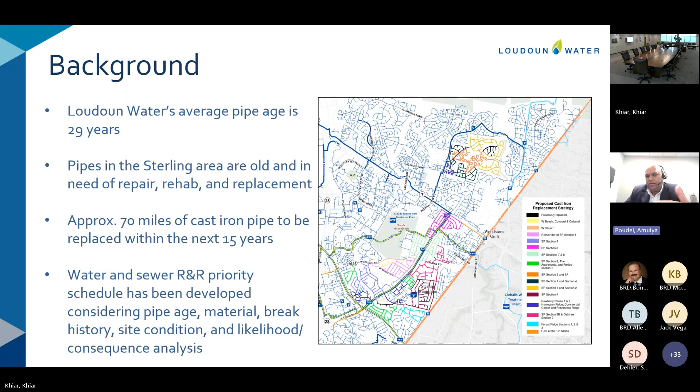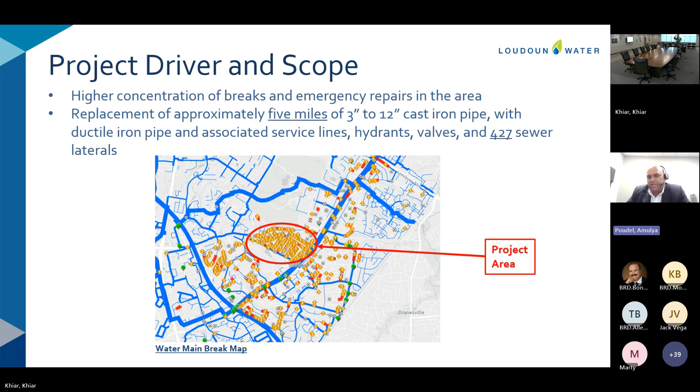Going back to the slide, the reason we do not have these 2 sections included in this project is that even within this area, these 2 streets in particular had a higher concentration of breaks. So we carved them out as a separate project. The board approved it a couple of months ago, so design is already underway, and we plan to put them into construction sometime next year. We just carved these out as a separate project earlier than this bigger package I have in front of you today.

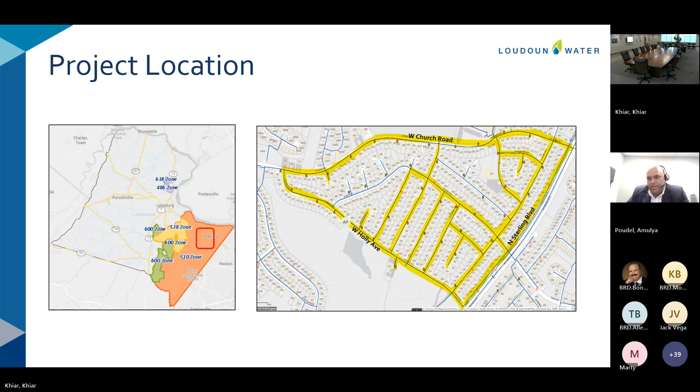I do not see any raised hands, so I'll keep going with my presentation here.

This is the typical scope of work associated with a linear project like this. The consultant will be tasked with providing project management throughout the duration of the project. Design services on this task order will include aerial survey, topographic base mapping, some geotechnical investigation, and primarily preparation of bid drawings, specifications, and cost estimating. On the permitting side, most of this water line is in VDOT right-of-way in a roadway, so there will be heavy coordination with VDOT for permitting, along with some Loudoun County permits.

We are ready to bid this project. We will need some assistance from the consultant with responding to bidders' questions, preparing addenda, and things like that, as bid phase services are also included in this task order.

I have 2 questions. Sure. I assume that the sewer laterals and the water laterals are just to the property line - is that correct? Yes, we will address only up to the property line, the meter, sorry.

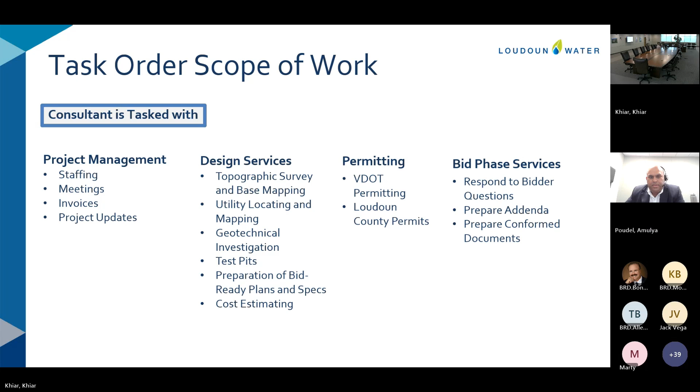So for this project, we selected J2 Engineers. J2 is one of our civil on-call consultants, and they've done several water and sewer linear projects for us just within the last couple years. They're very familiar with our engineering design manual and Loudoun County and VDOT permitting process.

For this project, what I have here is the itemized breakdown. This is a very high-level breakdown for the purpose of today's presentation, but the way we came to this is we built it from the bottom. The spreadsheet we use goes into much more granular detail, with multiple tasks, subtasks, and various labor categories. That's how we came up with this fee that was acceptable to us.

In this project's case, we had some other directly relevant projects, Broad Run Farms would be an example, about the same size, so we had data points to compare how this fee lines up with our past experience. Overall, we found the fee of $558,000 for this almost 5 miles of pipe replacement project acceptable. Most of the work will be performed by J2, but they do have ECS Mid-Atlantic doing geotechnical work, and Mid-Atlantic Utility doing the utility locating.

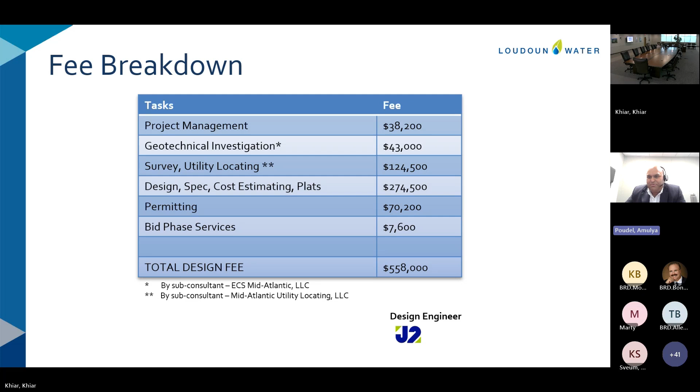Now, in terms of schedule, this is a relatively good-sized linear utility project. We anticipate about 18 months of design, followed by about 4 to 5 months of bid phase, from advertisement to CIP committee approval, board approval, and notice to proceed, followed by somewhere in the range of 20 to 24 months of construction for this project.

The next slide here, we've been tracking this in our CIP plan, the 10-year CIP plan. We've been tracking this project under Water 189.

The only thing I want to note is last year, when we were doing the CIP plan, we were tracking the sanitary lateral under a different project. But over the last year, we've talked a lot about these R&R projects, and we've come to an agreement that it makes a lot more sense to do this lateral replacement together with the waterline, since you'd already have all the maintenance of traffic in place and disturbance in the area. So this year's CIP will change this. I wanted to note that in the CIP we were tracking it under two different CIP numbers.

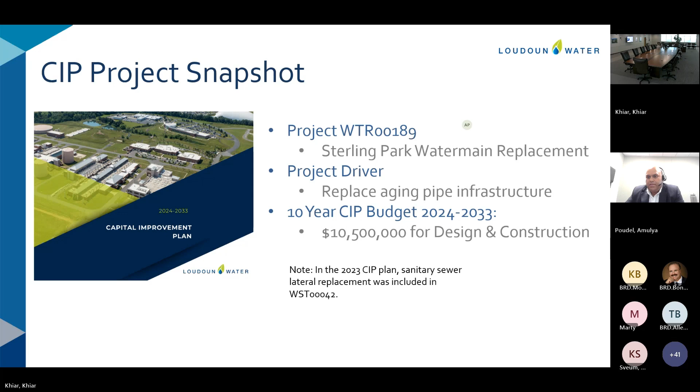And this is my last slide before the motion, so I'll pause for any questions. Do not see any questions. So with that, Mr. Chairman, I have the motion in front of you for your consideration. Are there any other questions? No, sir.

Jim, you want to read the motion? You seem to be ready. I'll be happy to.

I move the recommendation to the board to award a design task order for the Sterling Park Water Main and Sanitary Lateral Replacement Project to J2 Engineers, Inc. for $558,000, with an approximate 5% contingency to be controlled by the general manager, for a total authorized budget of $586,000. Additional costs will require board approval. I further move that this should be placed on the consent agenda.

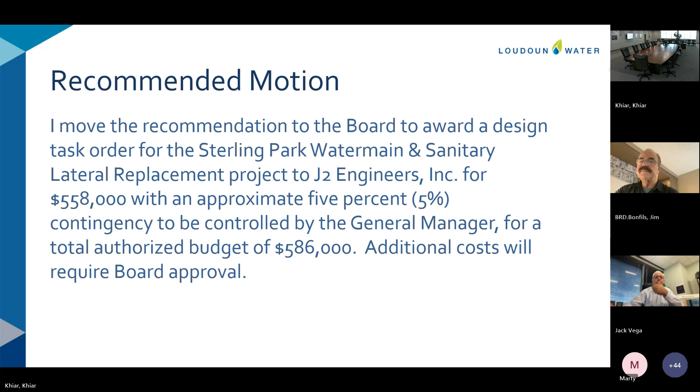Thank you, Mr. Chairman. Okay, the next item is the study task order for Belmont Ridge Road Water Transmission Main upsizing.

So, project location: this project is in the 538 pressure zone, generally located along Belmont Ridge Road between Route 7 and Trap Rock Water Treatment Facility.

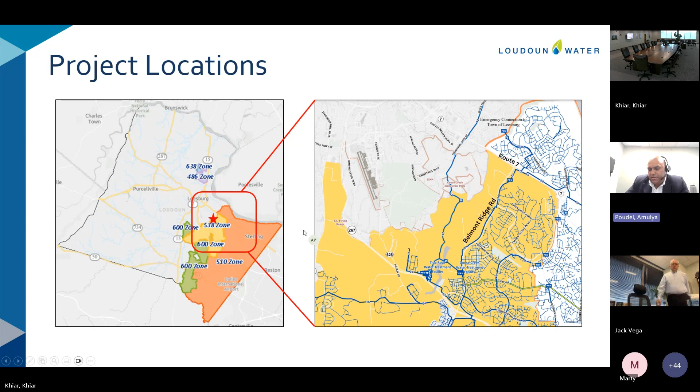Some background on the project: as you see on the exhibit to the right, there are three distinct water segments in this general project corridor. Segment 1, the red highlighted segment, is about 2,200 feet of 20-inch ductile iron pipe installed in 1973. Segment 2, highlighted yellow, is 7,600 linear feet of 20-inch ductile iron pipe installed in 2019, beneficially accepted by Loudoun Water in 2019. Sandwiched between these two segments is approximately 3,200 feet of 36-inch pipe, also beneficially accepted in 2019.

I want to give a little more background on these projects. The two segments beneficially accepted by Loudoun Water in 2019 were relocated, installed in their current location along with the county's Belmont Ridge Road widening project. The water line, though accepted in 2019, was actually installed by the county roadway contractor in 2018. Coordination about this relocation started even further back, in 2015-2016.

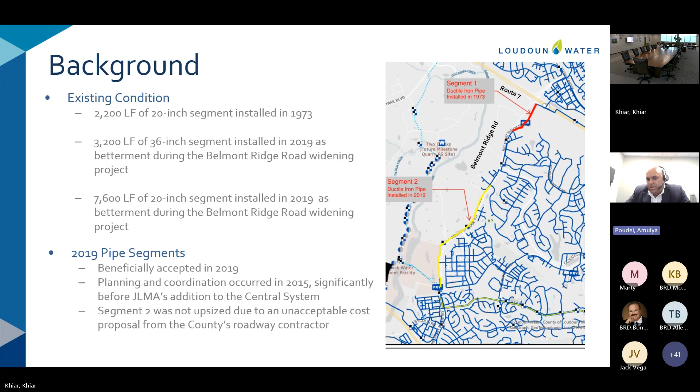As I said, we had just gotten started with the utility master plan update when these lines were being relocated. The 2018 water distribution update did recommend 36-inch pipe along Belmont Ridge Road. In 2019, with the addition of the JLMA service area, our master plan was further updated. At that point, with all the new demand from JLMA, the study identified that the 20-inch water main along Belmont was a bottleneck to the system and recommended adding flow capacity on that corridor.

With implementation of this recommendation, what will it do for Loudoun Water? One, it'll help us meet the growing demand, accelerated by the addition of JLMA. In addition, we are now taking steps to expand Trap Rock plant from 20 MGD to 32.8, which is the next presentation Savita will give after me. This upsizing would allow us to pump higher flows from the expanded Trap Rock plant into our distribution system, so we need this to support that expansion too. That's a little background on the driver for this project.

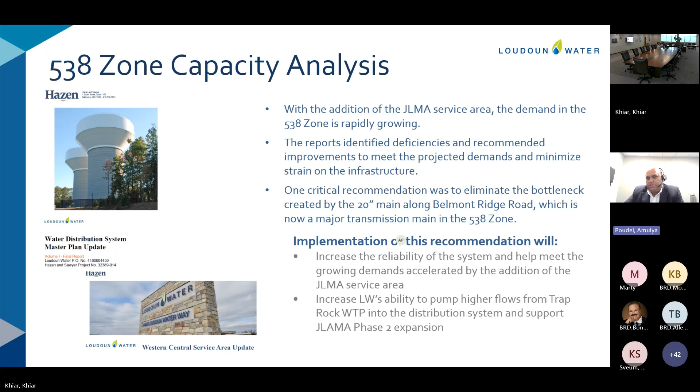Any questions? Right, I'll move to the next slide.

Now, because this existing water main is relatively new, 6-7 years old, we conducted hydraulic analysis, and it is hydraulically feasible to add flow in this corridor two ways. One, we can replace the existing 20-inch pipe with a larger 36-inch pipe. The other option would be to add a second, parallel pipe running generally along the existing yellow highlighted main, which would also deliver the same hydraulically.

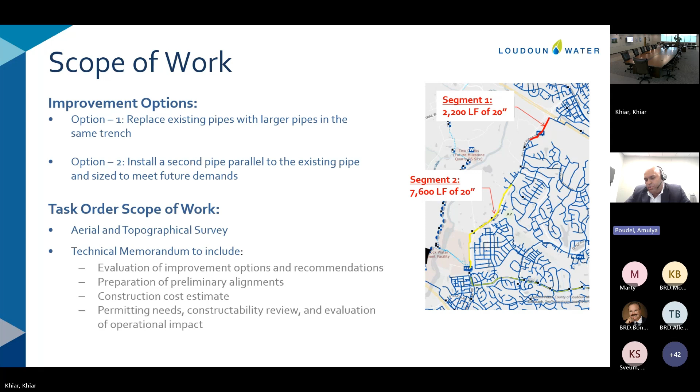It would work. Since there are two options, we felt the need to further look at what is more beneficial and more cost-effective for Loudoun Water, and that is what this task order in front of you today is for. The consultant will evaluate both options: cost analysis, impact on operations during and post-construction, and permitting needs between the two options. So this is not a detailed design—it's a pre-design study to help Loudoun Water make a decision on how to move forward.

In this slide, I dive a little deeper into activities involved in this task order. Like every other task order, this will involve project management throughout its duration. We'll be capturing aerial imagery for the site, and the consultant will prepare a topographic base map, preliminary plans, and profile for the water line. They will develop costs for multiple alignment options and look at constructability issues.

Permitting needs and any additional easement needs will also be considered—if we put in that second pipe, it will require us to get more easement, so that will be looked at in this tech memo. They'll also look at operational impact, since replacing an existing 20-inch with 36-inch in the same trench will cause issues during construction. All of this will be looked at, and the consultant will summarize their findings in a tech memo and provide recommendations to Loudoun Water.

And at that point, Loudoun Water will select, we will decide how we want to move forward with this upsizing here.

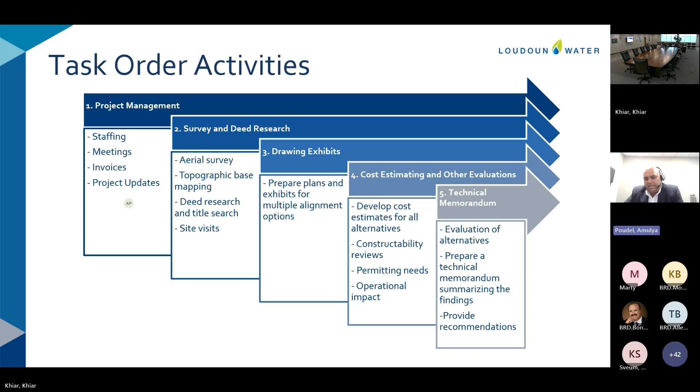I have a question. Do you want me to go back to the previous slide? No, it's just a question. You're probably going to find it out, or maybe you already know. Is the head loss between two 20s equal to the head loss between the 36?

I don't know if Darren is on the call. I know hydraulically both of them work, but when it comes to exact head loss, I do not know. Darren, are you on the call? Can you help us with that?

It's okay, I was just curious. But I can get back to you with the answer, Mr. Sheldon. Yeah, it's not critical. You guys are going to look at that because that affects the operating costs. But yeah, okay, I was just curious.

Go ahead, keep going. Darren, did you have an answer? No, I don't have that off the top of my head. Okay, thank you, that's okay. That was just a curious question.

So for this project, we selected RK&K as the design consultant. RK&K is one of our civil BOA consultants. They recently completed a 24-inch water main extension in the JLMA West area. They're pretty familiar with Loudoun Water's engineering design manual and the permitting process in Loudoun County.

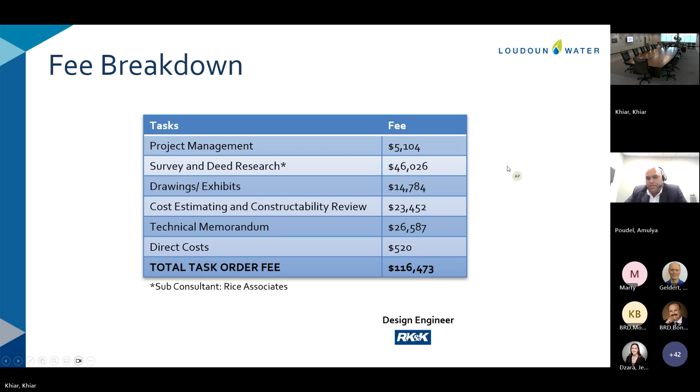Project schedule: we anticipate this study to be about 5 to 6 months. At that time, we will come back to you again for approval of the detailed design of the project, which we anticipate to take about 16 to 18 months, followed by 4 or 5 months for the bid phase, and then about 18 to 20 months of construction. So it's a long road ahead, but this is generally where we think the schedule for this project would be.

So last slide here. This project is also in our 10-year CIP plan. We are tracking it under Water 86. This is the last slide before the motion, so I'll take a pause again for any questions.

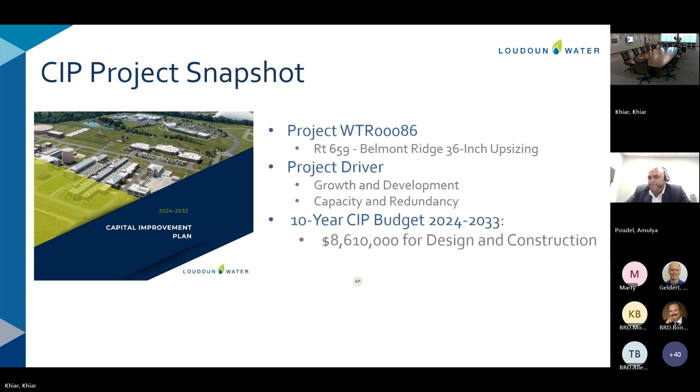Do not see any questions. Mr. Chairman, I have the motion in front of you. I'll make the motion this time, since there are no questions. I move the recommendation to the board to award a study task order for the Belmont Ridge Water Transmission Main Upsizing Project to RK&K Incorporated for $116,473, with an approximate 5% contingency to be controlled by the general manager, for a total authorized budget of $122,300. Additional costs will require board approval, and I recommend that this go on the board consent agenda.

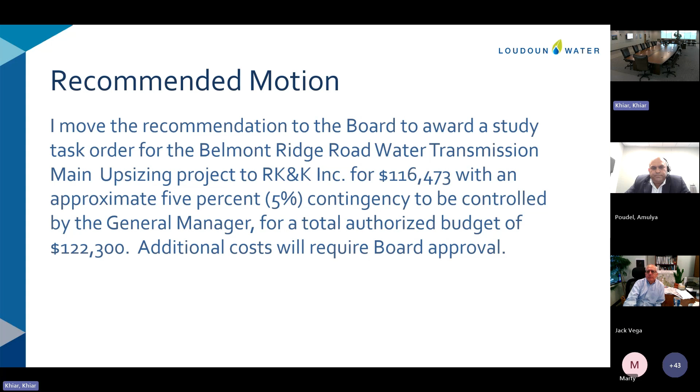Do I have a second? Second, Vega. Jewel, the roll call? Yes sir. Mr. Bonfils, yes. Mr. Moody, yes. Mr. Sultan, yes. And Mr. Vega, yes. Thank you, Mr. Chairman.

The next item is Trap Rock Water Treatment Facility.

Okay, the next item is approval of design task order, Trap Rock Water Treatment Facility uprate expansion to 32.8 MGD, design task 1.

Good morning everybody, just want to check that everybody can hear me? Yes. Okay, we can hear you great. All right, and I did request control. And if you double click, you should have control now. Okay great, oops, thanks, there we go.

All right, so good morning everybody. Jessica Edwards-Brandt and I are here today seeking approval of a design task order for the uprate of the Trap Rock Water Treatment Facility to 32.8 MGD. This is the first design task order, and we will come back next year with a second request. So Jessica is going to provide some background on our water supply and the drivers behind this project, and then I will walk you through the task order. Just for reference, Jessica is our Director of Water Operations. So I will go to the next slide, Jessica. Thank you, Savita.

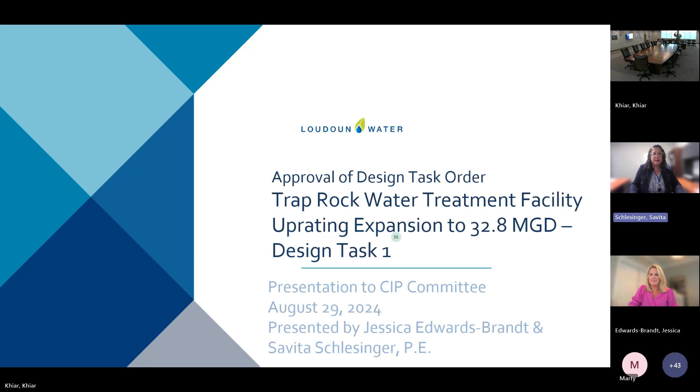Good morning. I oversee operations and will be providing background on this design task order to increase the Trap Rock treatment capacity from 20 million gallons a day to 32.8 million gallons a day.

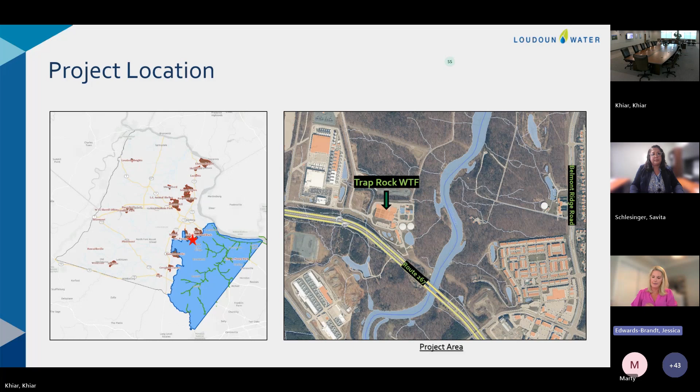A little bit about our supply background. To supply Loudoun Water Central System, we have three sources. Going out of order of the bullets on this slide: the first is Fairfax Water, and we can purchase up to 50 million gallons a day from them. Our second source is the Trap Rock water treatment facility, which is permitted to treat 20 million gallons a day. Our third source is the Goose Creek Reservoir, which is an emergency source only.

Goose Creek can be fed from Beaver Dam Reservoir, which can be pumped and treated at the Trap Rock treatment facility. On the raw water side, Trap Rock's Potomac River Pump Station is permitted to withdraw 40 million gallons a day from the Potomac River. In addition, our Milestone Reservoir will provide infrastructure to store water from the Potomac and pump to Trap Rock up to 40 million gallons a day. That Milestone Reservoir is projected to be online in 2028.

Loudoun Water's approach as part of the Potomac water supply was to build Trap Rock to 20 million gallons a day, but design it so that increasing capacity would be straightforward and planned. We are now at this point where we need to get ready to expand.

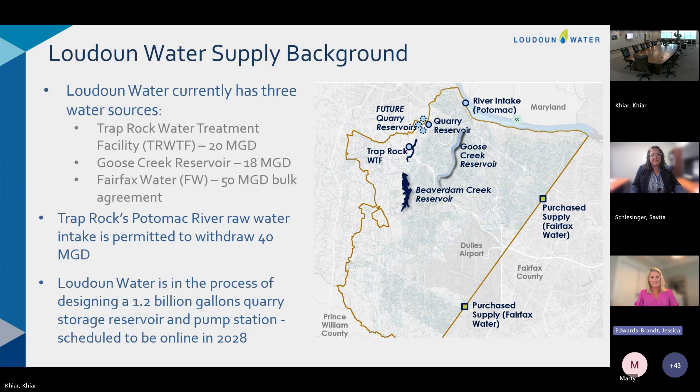Let's move to the next slide and talk about the drivers for this project. The operations team with planning and engineering has been monitoring demands in the central system. As we started to see demands increase, we began to work with our regulator, Virginia Department of Health, to execute a year-long study to prove out that Trap Rock could produce 32 million gallons a day with minimal impact to our processes and also minimal construction.

We started the year-long study in 2022 and finished in 2023. We've worked very closely with VDH, our regulator, to work through that process, and they are in agreement with what we're doing. They are also looking at our demands and our production, and they are in support of our proposal for increasing our infrastructure.

Let's take a look at the demands on this slide. This is our whole central system water demand production. The bottom line is our average day demand. In 2025, we're at around 29 million gallons a day, and in 2035, we're at around 39 million gallons a day. We can easily supply the system with Fairfax water.

But we like to use Trap Rock, obviously, because we have a lot of growth in the western part of our distribution system, and Trap Rock helps with that. It also helps with ease of operations. So we always have a percentage of Trap Rock water in our distribution system along with Fairfax water. As we move along in years from 2025 to 2035, we're starting to increase the production coming from Trap Rock. We're not getting near our maximum permitted capacity of 20 million gallons per day, but we're inching a little bit closer, and that's just average day demands.

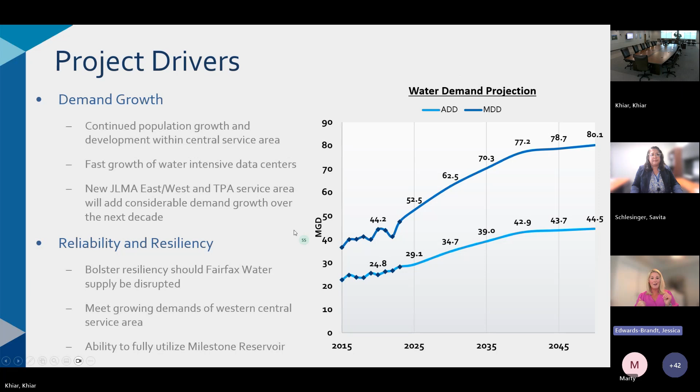Thank you, Jessica. As Jessica said, Loudoun Water staff spent a year working with VDH and CDM Smith to understand what we could push through the trap rock plant as it currently is configured and meet all the regulatory requirements. At the end of the study, the results showed that we could get to 32.8 MGD. VDH approved that in the middle of 2024.

So we're now embarking on a project to get us to that expansion. This expansion step was anticipated during the original plant design, and as Jessica said, we're able to do this without really modifying or adding any process tankage. It's really all upgrades and expansion of supporting facilities.

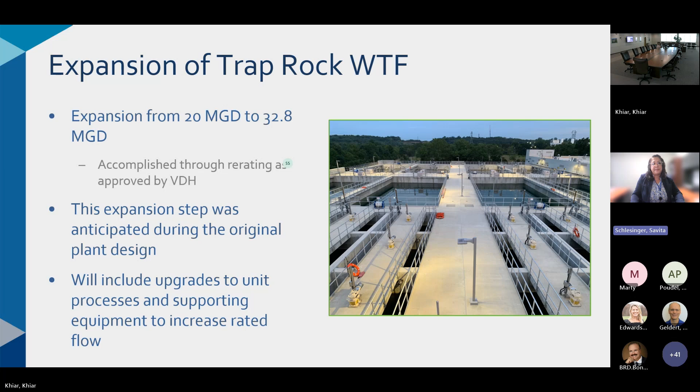And because the plant has been in operation for about 6 years now, there are some O&M improvements that staff would like to make if we're going to come in and do a project.

So we decided to split this design into 2 task orders. It will ultimately be one design package at the end, and we'll have one construction package, but we elected to split it into 2 design task orders so that some of the items on this list, we can get to about 60% design fairly quickly, while other items need a little more analysis and decisions to be made. We wanted to do preliminary engineering first, and then scope the final design in a second task order.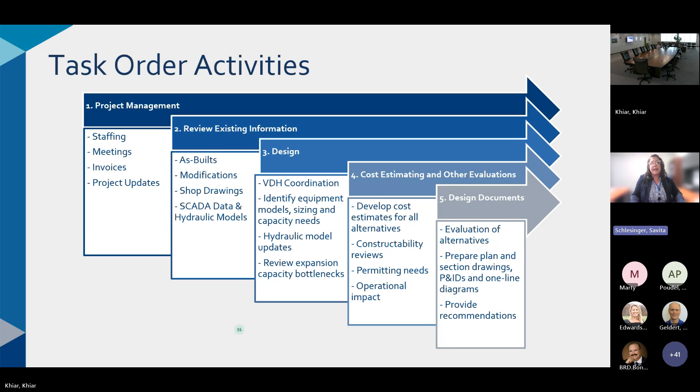And for each element - sorry, we're sharing an office here - we will also have a cost estimate developed for each of the alternatives if there's a decision for us to make, and then an overall cost estimate. They'll also perform constructability reviews, start working on permitting, and assess operational impacts.

So this is a high-level breakdown of our fee, put together in a similar fashion to all of our task orders. We sit down with a consultant and write the scope of work, and once we're satisfied that all the necessary elements are captured, the consultant begins to work on the fee. The fee is developed in a bottom-up approach - they estimate hours per discipline for each design element and submit that to us. We do a review, some back and forth negotiation until we get to the final fee. Staff has reviewed this in detail and we find it acceptable.

And as I mentioned, we will come back in 2025 for the remainder of the design.

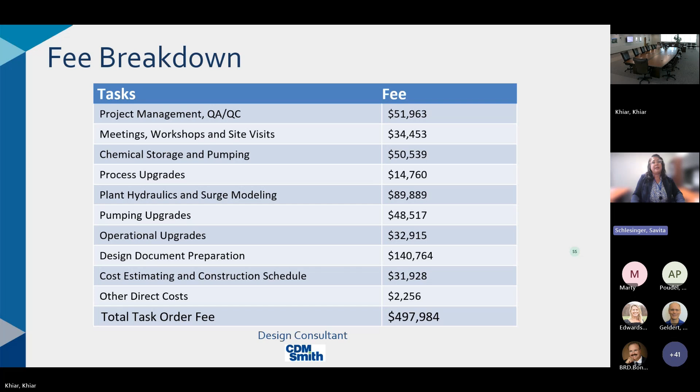Okay, sorry about that. So I do have a schedule here for you. This first design phase will take approximately 6 months, and then we will come back and seek additional funding for the remainder of the design. That will include additional funding for permitting and for the bid phase, where we will put the construction package out to bid. We expect construction to take approximately 18 to 24 months.

And as Jessica said, this is great timing. We're hoping a milestone right now is scheduled to complete end of Q2, Q3 of 2028. So this construction will wrap up shortly after that, and will come online shortly after the milestone comes online.

So here is our CIP project snapshot slide. This is part of our 10-year CIP, and we have $2.1 million for planning and engineering. This is the last slide I have before I go to the motion. Let's see if there are any questions or hands raised.

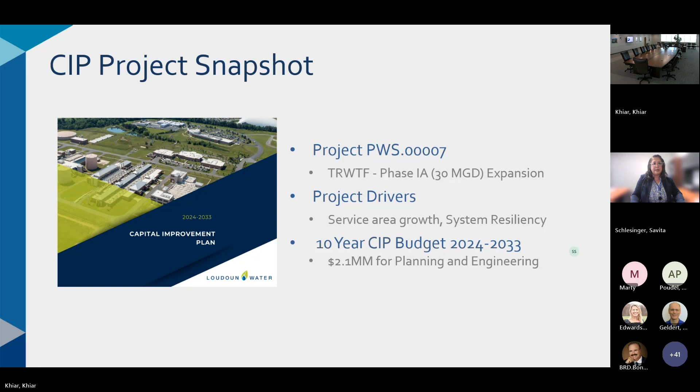So here is the motion.

Mr. Sultan, are you muted, sir? Oh, yes. Are there any questions? I have no questions. No questions for me either. Okay, I'll make the recommended motion.

I move the recommendation to the board to award a design task order for the Trap Rock Water Treatment Facility uprating expansion design task 1 to CDM Smith for $497,984, with an approximate 5% contingency to be controlled by the general manager, for a total authorized budget of $523,000. Additional costs will require board approval. With the agreement of the rest of the committee, I'm recommending this go to consent on the board agenda.

This is Jim, I second. Can we get a roll call vote? Yes, sir. Mr. Bonfils, yes. Mr. Moody, yes. Mr. Sultan, yes. And Mr. Vega, yes. Thank you. Thank you.

So our agenda for this morning: we'll start off with several project snapshots of some of the smaller projects that have been in construction here through the second quarter. Then we'll go into a little bit greater detail on the Milestone Reservoir and Pump Station project, as well as the Broad Run expansion to 15 million gallons per day treatment capacity. And then we'll wrap up with our quarterly summaries of active, completed, and upcoming projects.

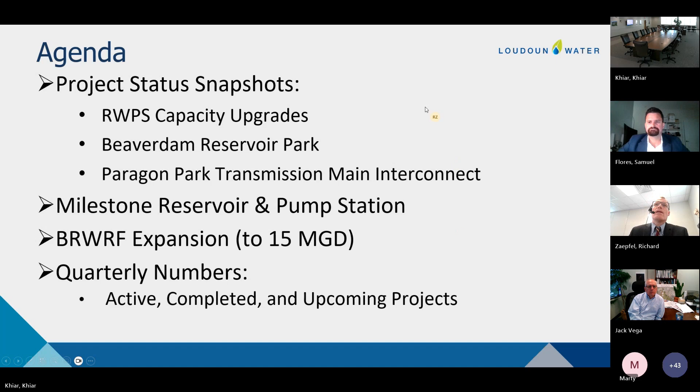Our first project snapshot here is the Broad Run reclaimed water pump station capacity upgrades. This project is well along in construction through the second quarter. We have almost spent the entirety of the contract value. Completed work activities during the second quarter were installation of the variable frequency drives to wrap up the electrical infrastructure, as well as finishing the HVAC equipment installation, continuing on with painting and coating, and completing commissioning, or testing and startup, of the new facilities. All that remains for the third quarter here is punch list and project closeout.

This project has already served us very well, especially during some of the very hot days in July. We expect this project to be completed here in the third quarter, and that would be shared in the third quarter report coming up in October. With that, I'm going to pass it over to Sam to walk through several projects.

I have a question. I'm assuming we're 98% done since we're 98% value through. We are, the project, yes.

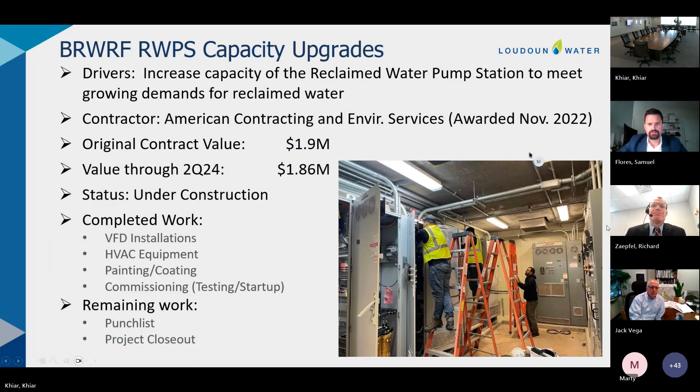Thanks, Khiar. Good morning, everyone. Oh, getting a little bit ahead of myself here. I will present on a few projects before taking a deeper dive into Milestone Reservoir.

We'll start with Beaverdam Reservoir Park, and the headline on this one is we are very close. At the end of our Q2 reporting period, we had completed all structural and landscaping work, the bulk of the scope of this project. There was some minor architectural work and corrective work on the parking lot asphalt surface that has since been completed. At the current date, it's only the administrative requirement of obtaining an occupancy permit from the county that's delaying substantial completion. So we're very close.

After that, we have a short period of punch list work anticipated, with a target eventual completion date in early September, which would obviously be followed by coordination with Nova Parks for the grand opening of the facility.

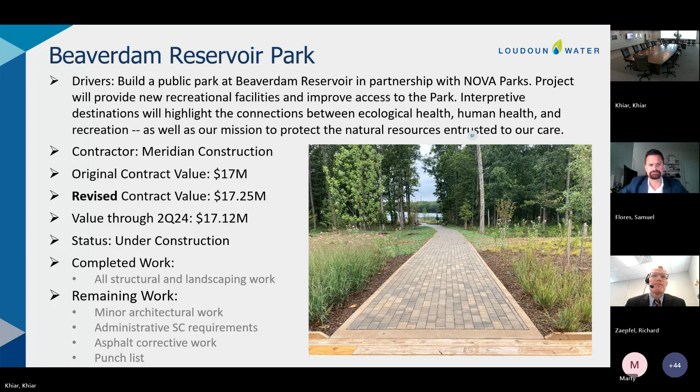We'll follow that with Paragon Park Transmission Main Interconnect. This project achieved substantial completion during the reporting period on June 6th, well ahead of its contractual deadline of July 4th. As a little bit of an extra report beyond Q2, it did achieve final completion on the 9th of July, so it was well ahead of schedule across the board. Budget-wise, we were just a little bit over 1% on changes over construction cost. So a very successful project overall, one of those rare instances of a project completing within its original schedule. I'd like to recognize our project manager, Matt Oshegi, for his efforts in resolving the issues we did have along the way to make this project a big success.

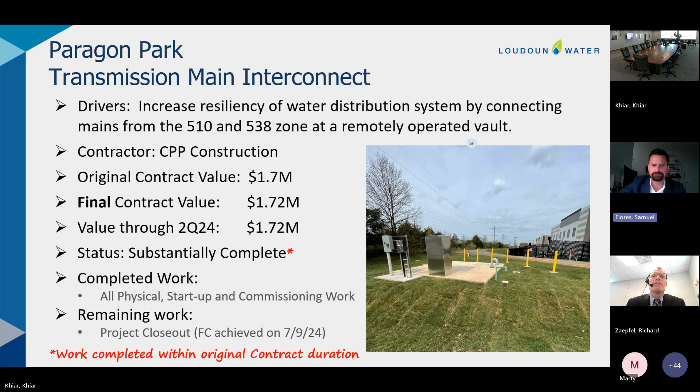Next up, we have a little bit of a deeper dive into Milestone Reservoir and Pump Station. The intent here is to provide a quarterly update to the CIP committee along with all of our construction quarterly updates. This is, I believe, the second entry in what will become a series of updates.

At the end of Q2, Clark, our CMAR, had a lot of success getting mobilized and hitting the ground running to get some critical work activities completed early. We do have the setup of temporary facilities, power, internet, trailers, all completed now. Initial site work has begun.

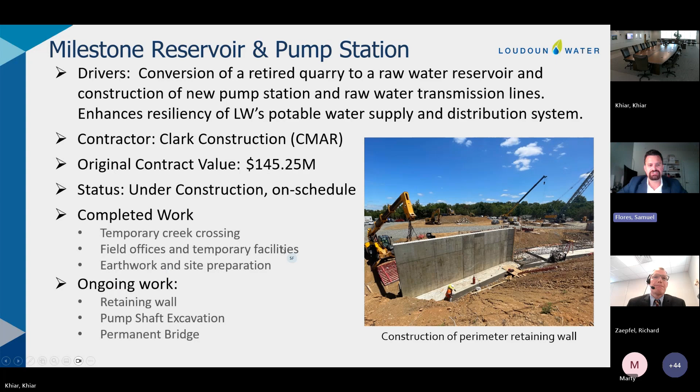We have an access crossing across the creek for the initial setup. We've started construction of our perimeter retaining wall and our permanent bridge, as well as the start of our pump station shaft, which will eventually become a 270-foot deep, 35-foot diameter pump shaft with 3 tunnels, as we've presented to the committee in the past year during our pre-construction phase.

In terms of budget, we have not incurred any additional cost to date. We are about 10% spent, which represents a little less than 10% in actual progress. There are some bonds and insurance costs on the higher side of our typical project that were disbursed at the beginning. But we are making good progress and currently tracking about 2 weeks ahead of schedule on our critical path.

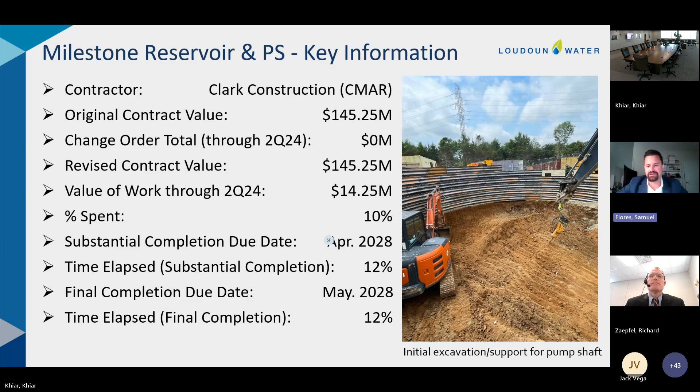In terms of communication between parties, so far pretty successful overall - 60 RFIs and 200 plus submittals reviewed at the end of our reporting period. The intent is, we have a long project, but that doesn't preclude us from running into supply chain issues that are still somewhat prevalent on the electrical equipment side. So we're trying to stay well ahead of any issues down the road.

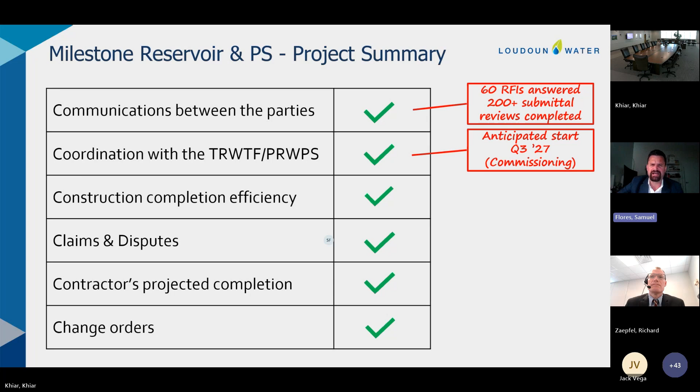In terms of communication with Trap Rock and the Potomac Raw Water Pump Station, we anticipate the bulk of that coordination will take place when we start the commissioning phase of the facility, expected around Q3 of 2027. So nothing to report on that.

As I said, we are ahead of schedule currently. Big kudos to our subcontractor Drill Tech for really taking the bull by the horns on the tunneling work. So far, no unresolved claims - had a few, but it's all been worked through to date, and no delays claimed or reported. In terms of change orders, none executed to date at the end of the reporting period, but we have negotiated a few changes that we anticipate will be incorporated towards the end of Q3, and we will report on those during our next update.

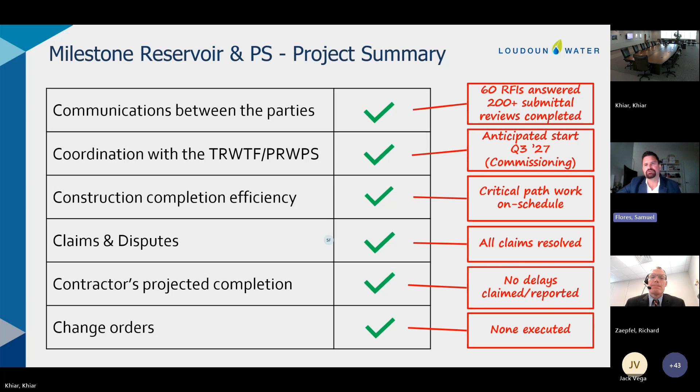With this last slide, the intent is to bring a preview of the shaft excavation to the committee. This is a pre-rendered preview of a model generated by our inspections team using LiDAR. Nowadays, our inspectors can attach LiDAR scanners to iPads and get very quick, detailed records of the subsurface condition as we mine down the shaft.

What you see on top here is the shotcrete liner initially applied along the circumference of the tunnel to protect miners - it's going to get a final liner after that. As we go down, we are building that shotcrete and concealing the surface of the rock, so this LiDAR scan, continuing through the length of the vertical shaft and horizontal tunnels, will allow us to go back and have that detailed reference of subsurface conditions. We can take simple measurements and assess anything we need to down the road to resolve claims or just have that record in general.

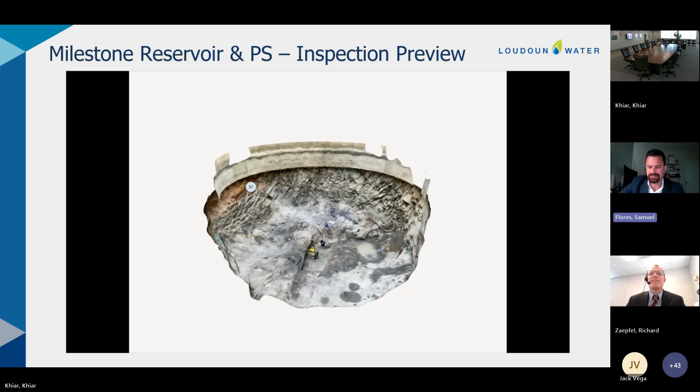The intent here is to continue to present sort of an update - maybe time lapse is not the right term - along with each construction quarterly update, to take you guys on a journey as we go down the 270-foot shaft depth and the horizontal tunnels. With that, before I turn it over to Rick, I'll take any questions from the committee.

I have a question. Are we creating a digital twin of the after-construction for our record keeping and maintenance? Do you mean of the shaft itself, Mr. Vega? And the piping, yes.

In terms of piping and all the other infrastructure, we do have a task to provide record drawings of the facility. We have a pre-rendered model of the design that could, in theory, be as-built to reflect final conditions and any changes, but I don't think it's quite something we have in our scope to update the model itself. It could be, perhaps depending on how we are doing on our CA budget towards the end, we can evaluate whether that's something that'll bring value to us for the future.

Thank you. Anything else? All right, Rick, I'll turn it over back to you.

So for key information on our Broad Run expansion project, this project has been in construction for several years now. Our change order total is 2.7 million through the first quarter, bringing our revised contract value to just under 79 million. Through the end of the second quarter of this year, we're about 97% spent in terms of contract price.

In terms of contract time, the substantial completion due date is next month, September 20th, and through the end of June we were 95% complete in terms of time relative to substantial completion. Final completion, due 180 days after substantial completion, is due mid-March of next year, and through the end of June we were 84% consumed on contract time relative to final completion.

Any questions there?

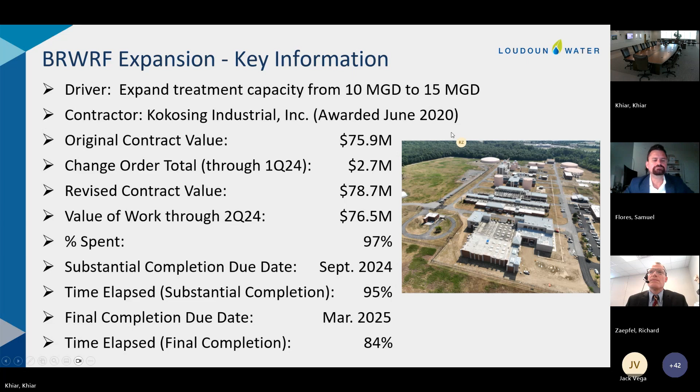Now we're going to take a look back at the project status. What I've got in front is a view of the project pre-construction, showing all the different work areas as red or not started. This would be the view as of the summer of 2020. Also not shown on this graphic is all the yard piping that couldn't be depicted, but there were several miles of yard piping, including large diameter piping, that were also part of the project, in addition to the work areas shown in red.

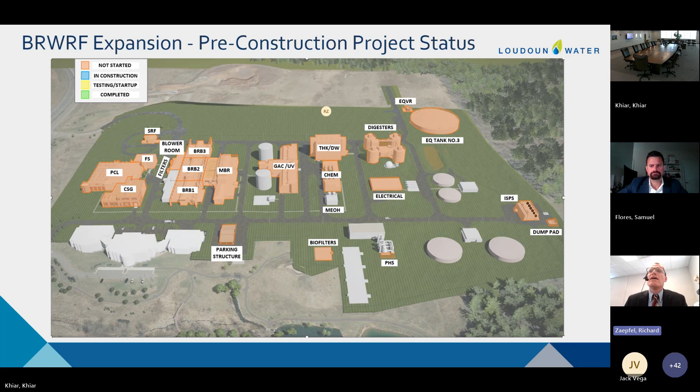Now jumping to the end of June, green and yellow still dominate, and we're down to just one area in construction currently. So we're really in the final stages of this project as we move through the second quarter and into the third quarter of this year.

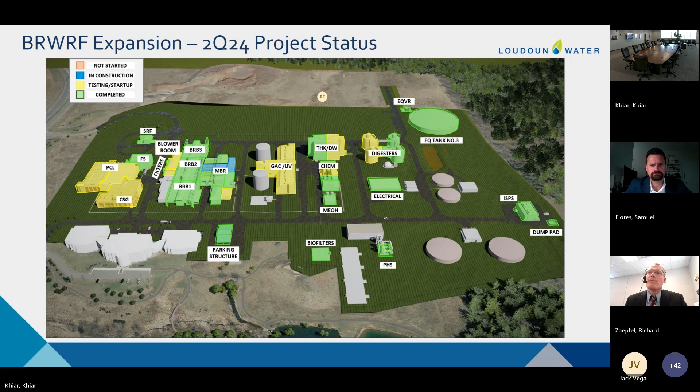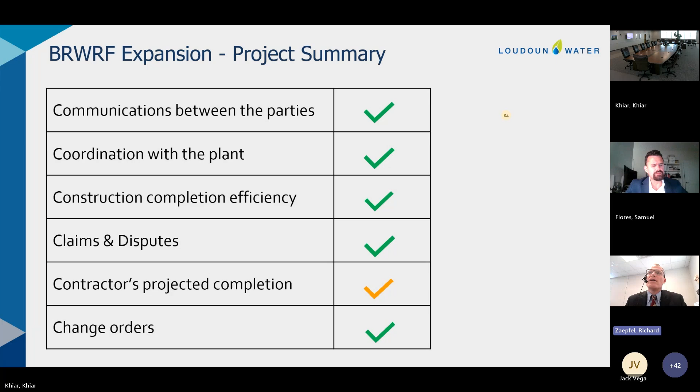Now for our project summary. Communication is still very good between the owner and the contractor on this project, and we've used the contract tools to the maximum to foster that communication. We've completed around 590 requests for information and answered those questions the contractor submitted, and we've reviewed approximately 2,185 submittals that the contractor provided and returned those to the contractor.

In terms of coordination with the plant and with operations to perform this retrofit project, we have executed around 610 individual coordination and shutdown requests that have impacted different parts of the plant as necessary to facilitate the construction.

In terms of construction completion efficiency, the contractor is 85% complete in terms of punch list items. That tells us the contractor has done a very good job working on items required for final completion well in advance of substantial completion. That's a good indicator the contractor is in a strong position to not have to use the entire 180 days to get to final completion after substantial completion—a good sign for completion of the project.

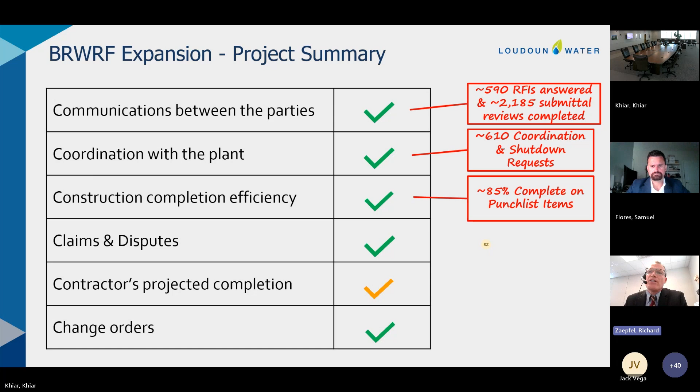Claims and disputes—we don't have any outstanding claims and disputes. We've been able to resolve all of the claims the contractor has submitted thus far. In terms of completion, we're tracking to be about a month late as of the contractor's latest project schedule update, so we're looking at late October, early November as the proposed finish date as of now. We're still at 14 change orders executed so far on the project. Any questions about this information?

Yeah, I have one question. With the coordination and shutdowns, have we had any permit violations as a result, or have we avoided all of that?

We have not had any permit violations that have been a direct consequence of the project. We've done a very good job maintaining plant operations alongside these disruptions and shutdowns and tie-ins and such that have been necessary to keep construction moving forward.

I assume our plant personnel should get a kudo on that. Absolutely—fabulous job by our operations and maintenance team at Broad Run and the contractor as well. The parties have worked well together to move this project forward and deal with a lot of the complicated aspects of the project while keeping the plant running. All right, thank you.

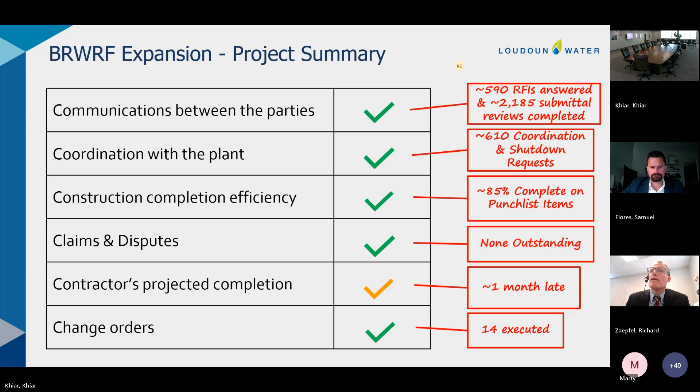That project was late. There were some delays, but we have reached agreement with the contractor to reconcile the delays and nearly close that project out at this point. So the roofing project should appear on the closed projects list for the third quarter report.

Keith: You had mentioned there were delays, can you elaborate a bit more on the cause? Sure, the primary delay on this project was the skylights. The contractor had some trouble administratively getting those ordered, and that led to a delay of the delivery, and the fabrication of the skylights also took a bit longer than anticipated. So those things combined to delay the project.

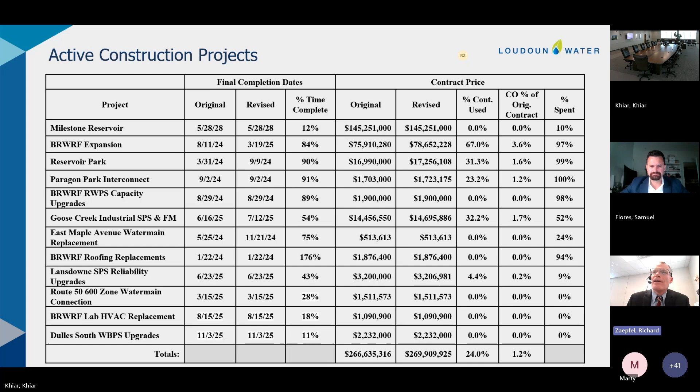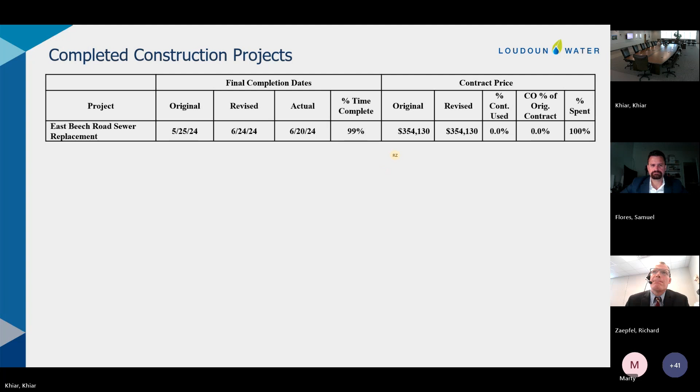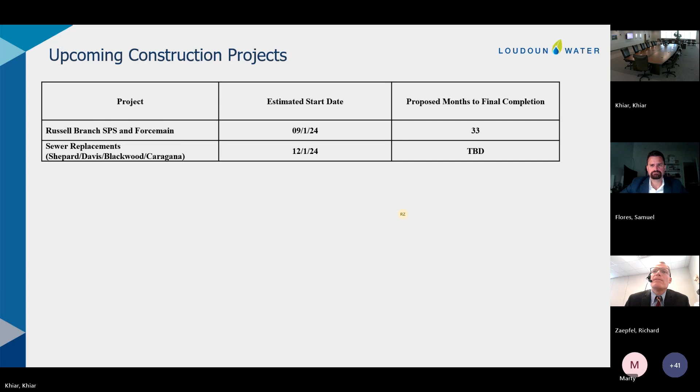The last slide here is the look ahead for anticipated projects that would start construction in the third or fourth quarter of this year. We've got two that will be starting construction over the next six months or so, and that is all that we have this morning. Any questions or additional questions? No, doesn't seem like it. Good job, okay, thank you.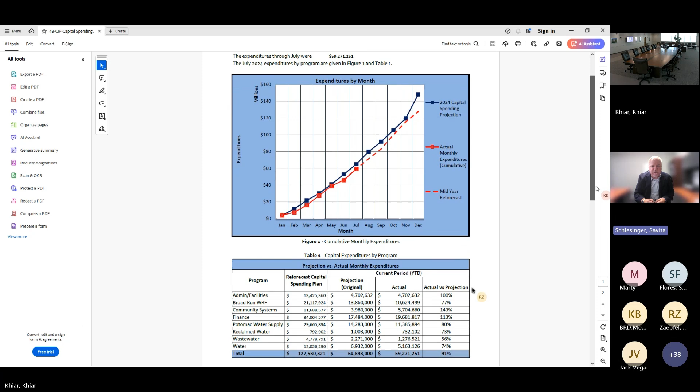That's been great, and that's where we are through the end of July. I'm going to presume there aren't any questions and ask Khiar to scroll over to the second page of the presentation. Okay, so the second thing I'll talk about is the mid-year reforecast.

So this time of the year, every year, we take an opportunity to look at our projected spending for the second half of the year and see whether or not we can update those numbers. And we've done that. Our reprojection is that rather than the 148 million in the approved budget, we think we're going to spend about 128 million at the end of the year. So about 86%, coming in close to the 90% we've been tracking all year.

You can see here some characterization of the spending variances in the four categories. But the total that we project we will not need at the end of the year is just a little bit over $20 million of the original 148. That puts the reforecast at about 127 to 128 million. If there are any questions, I'd be happy to take them.

We've been doing really well this year, and kudos goes to staff for doing a great job of originally forecasting and then implementing the spending in a way that matches the original forecast.

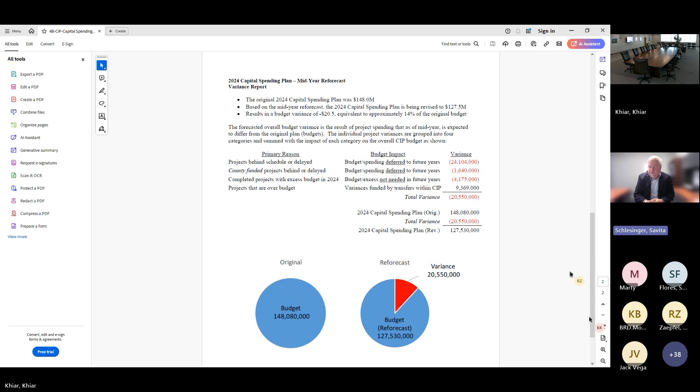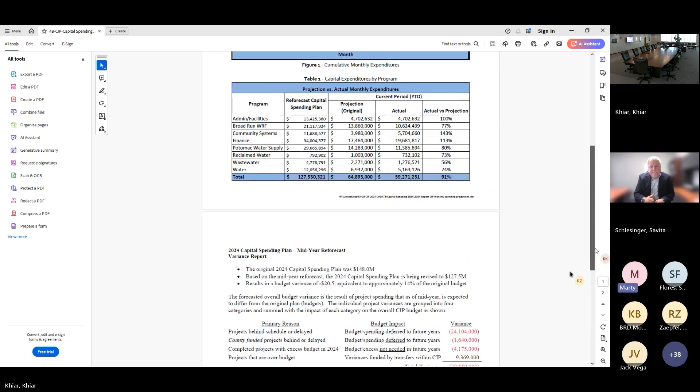The only question I have is, go back to the graph—yeah, to the next one up. I noticed it tails off toward the end. It seems to be tailing off. Is there any significance in that?

No. The reason the graph shows it's so steep in the original projection is that there's spending we actually pay for in January of the following year. So in this case, the spending processed in January 2025 is shown on this graph as charged back to December, because even though the invoices are processed in January, it's for work that was done the previous year in the December timeframe. So sometimes that's a little harder to project.

I don't think there's anything significant about the tail off at the end. We'll see—it may mirror the original forecast, or it may just maintain more of the straight line that's being shown. But I don't think there's anything significant to it.

All right. No, I would like to add that this has been a great meeting, lots of information and lots of exciting stuff ahead. I want to echo everyone else's comments on the committee—you guys have done great work and continue to do great work. So thank you, Mr. Chairman.

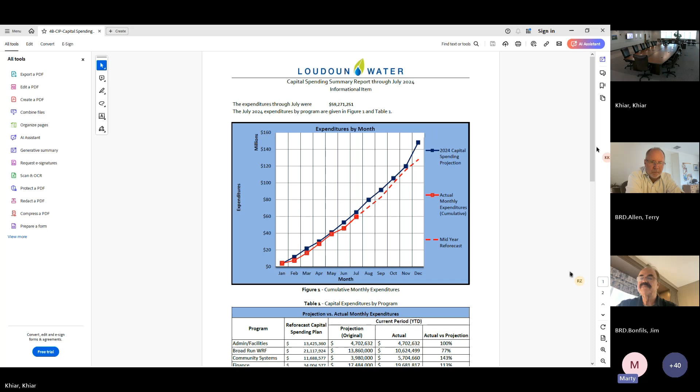Mr. Chair, I'd like to interject if I could. I don't want to revisit the design portion of action item 3, but it triggered an idea we should consider. Maybe I'll ask staff and you as the chair to endorse what I'm thinking—we're replacing 5 miles of water line, and I'm not just thinking about the residual value of that old water line, but also about having sustainability goals for projects of that magnitude, and becoming leaders in recycling and reusing some of these materials. This isn't replacing 2,000 feet of water line—this is a 5-mile project. I think it's our responsibility to at least ask whether we should include that in our specifications, or have some goals for recycling and reuse of the materials we're replacing. I'm curious whether that's worthwhile exploring, and I'm happy to adjourn afterwards.